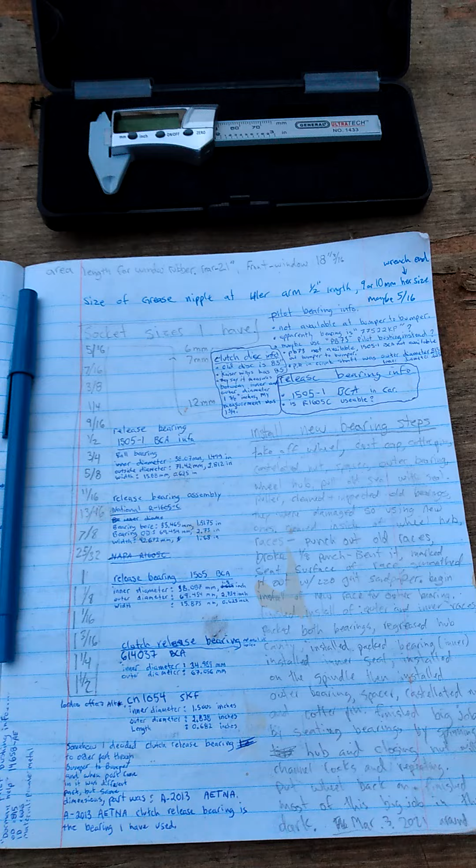Today's video I'm going to talk about a whole bunch of stuff. I don't know, I'm kind of a little bit mixed up in my words right now, as usual.

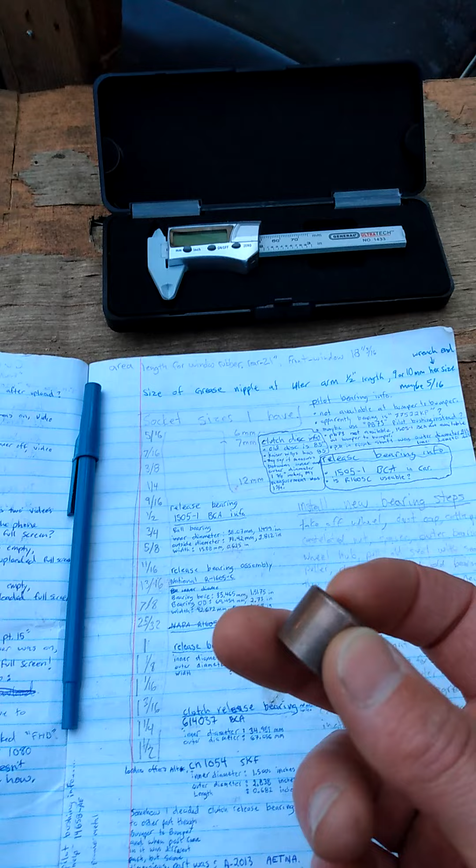But anyways, so this is the pilot bearing that I was looking at a little while ago, right? So I finally got around to searching for the pilot bushing. So I kept on picking away at it, doing internet searches, talking to people like Bumper to Bumper about if they could get me a bearing. That's apparently the bearing that was in the end of the crankshaft in the Rambler. Apparently it was outer diameter 0.815 and the inner diameter was 0.625.

Right, so I talked to the engine builder, and he finally got to it. He pulled it out. I phoned him back about a week later, and he said, "Okay, I'm really sorry, I forgot about that, but let me go get it and take a measurement." And so he did, and those are the measurements he gave me. And so I was searching for a pilot bushing with the same outer and inner diameters, and that was the pilot bushing PB73 by Pioneer.

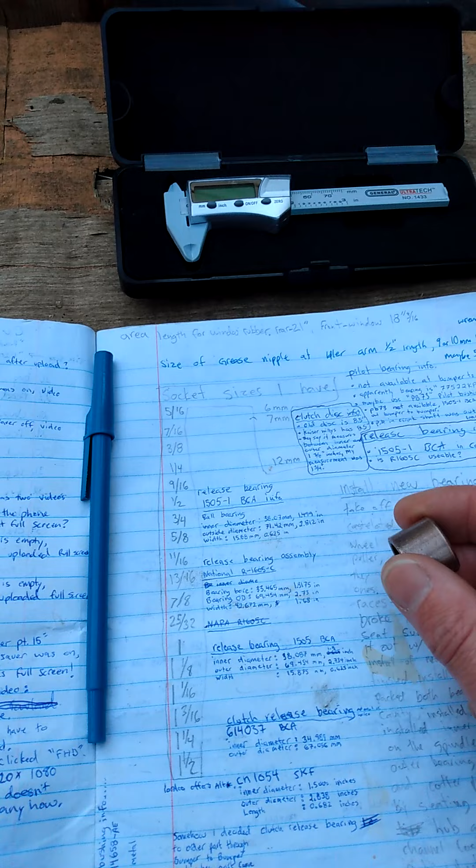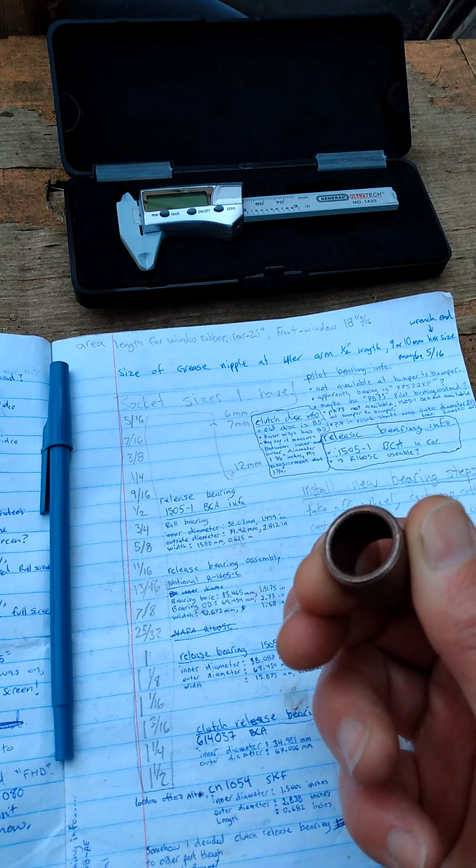Now, the guy that was redoing my clutch down in New York, he said there's certain pilot bushings I can't find, right? So give me the dimensions of yours and I'll see if it's one that I can't source, and we'll go from there. So I gave him the dimensions of the pilot bushing that was in there, and he said, okay, that is the one that I can't find, so I'll just make you some out of Oilite. And apparently Oilite is oil-infused metal. So that's apparently really good for a bushing, right?

Go figure. Or don't go figure. I don't know. I'm not really sure if that's a nice thing to say to somebody, but in case it isn't, I take it back.

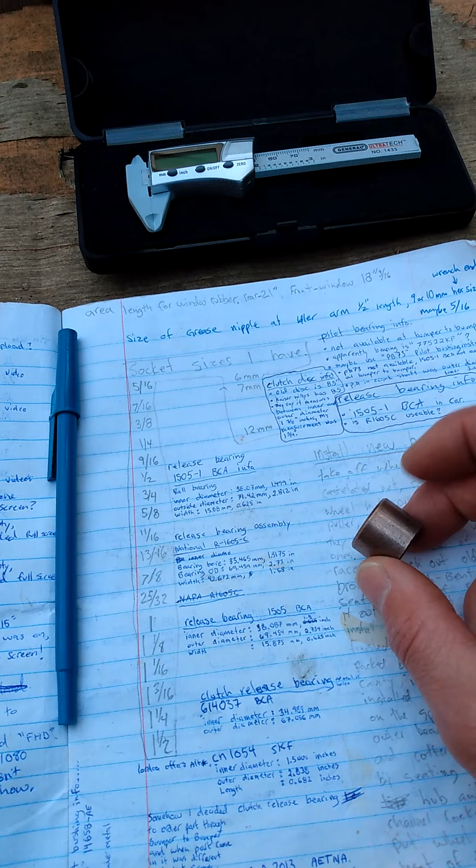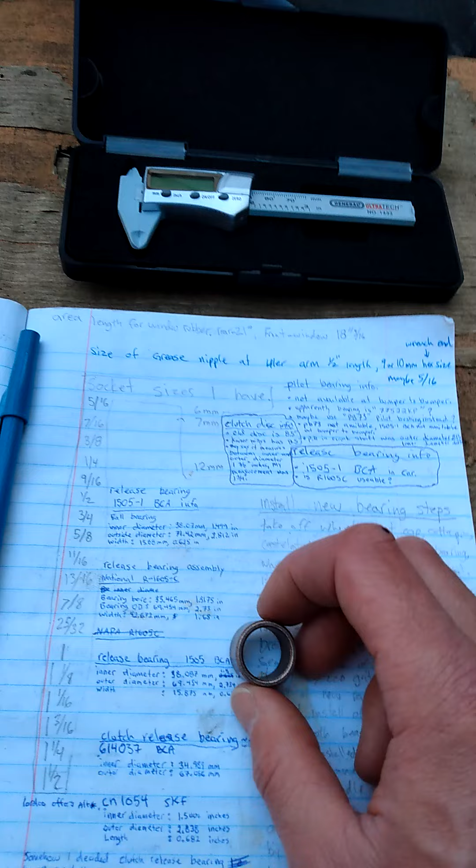Anyways, so I was talking to him about the pilot bushing, and he said, yeah, I can't find that one, I'll just make you some. And then I said, okay, well, I haven't given up on looking. And what I did is I did my own search, and I found maybe 2 or 3 places that had a pilot bushing that was literally maybe 0.001 of a difference. Instead of being 0.625, it was 0.626.

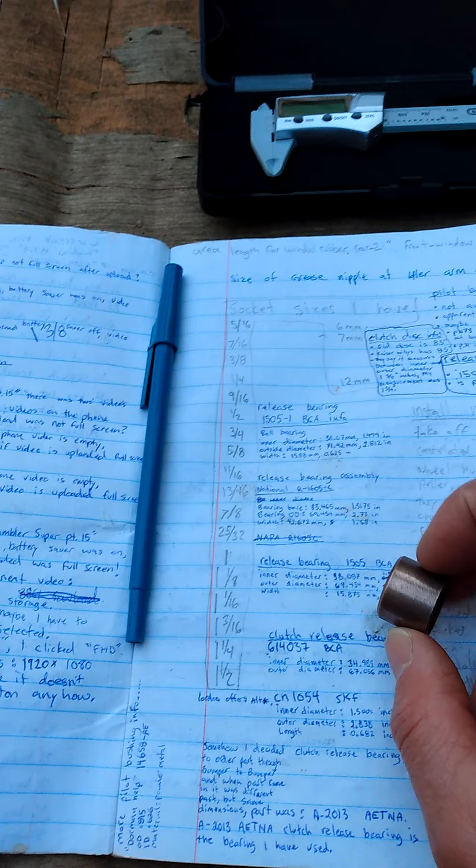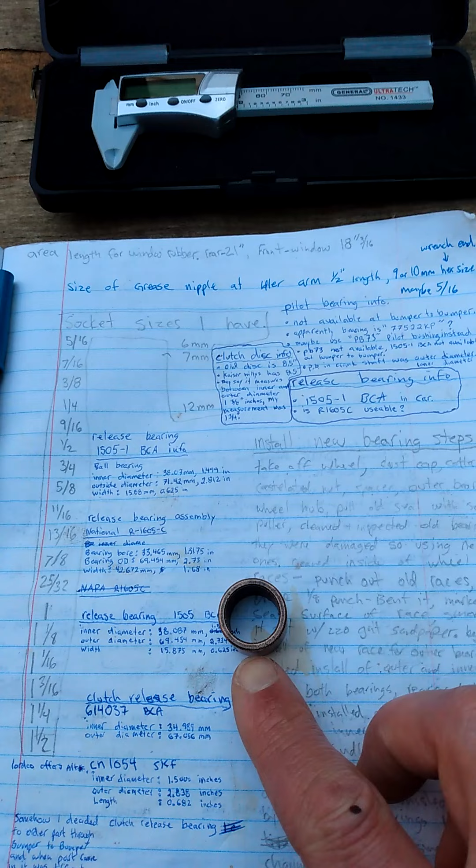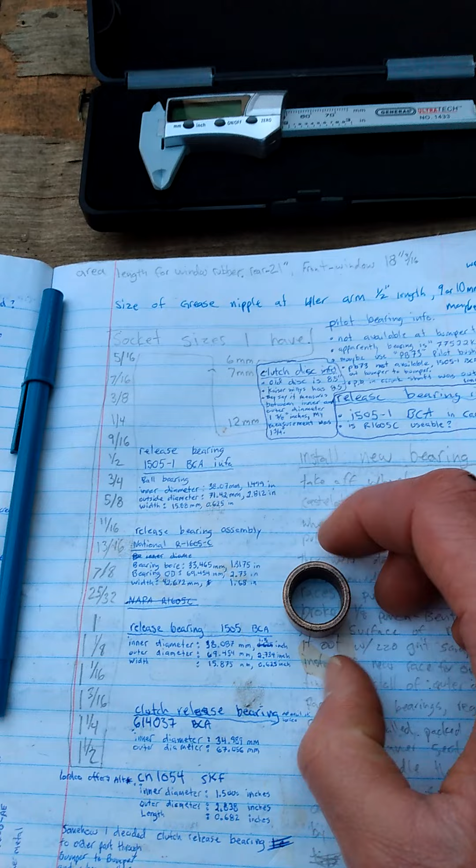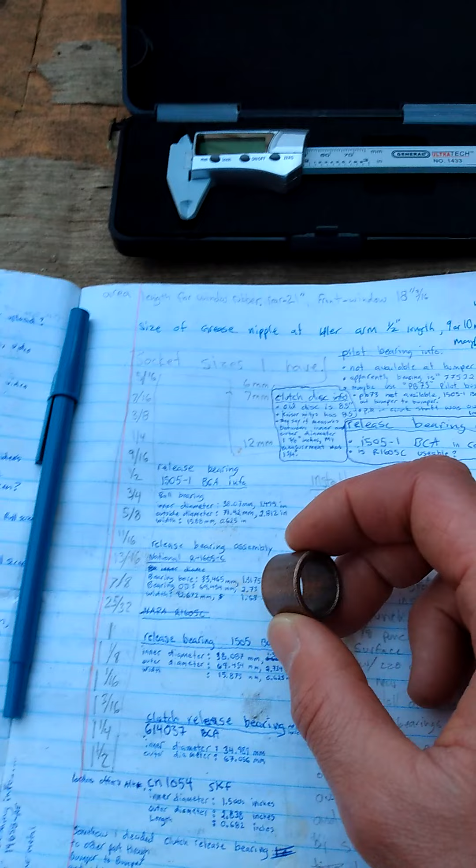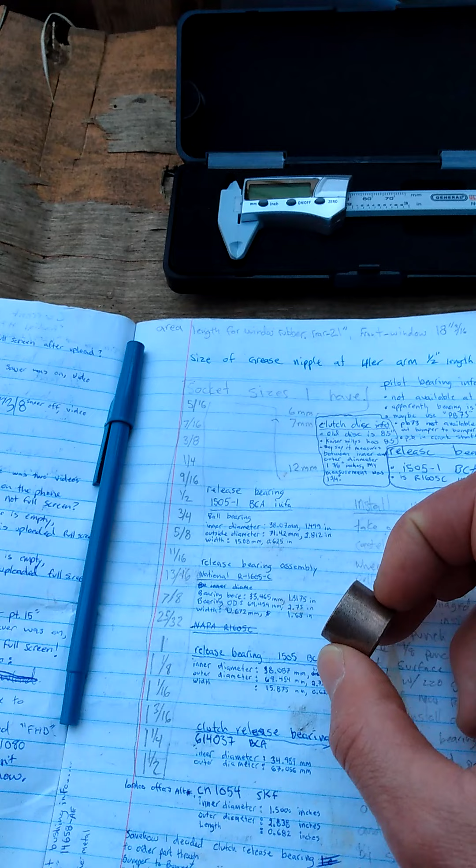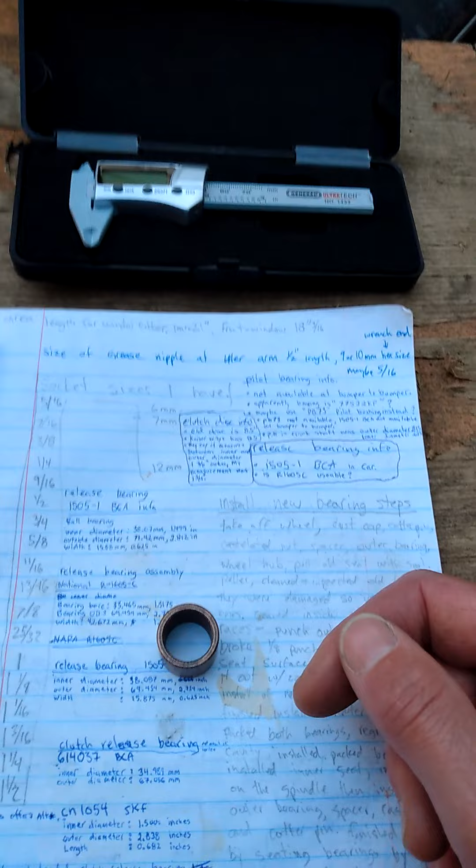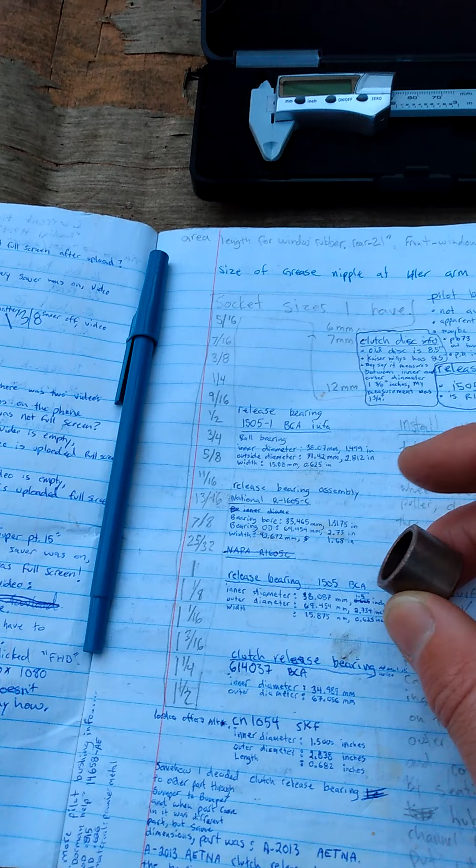According to him, if I understood him correctly, the only time that the transmission input shaft will be spinning inside this bushing is when the engine speed is going faster than the transmission input shaft's speed, like when you're revving to change gears or something like that. I'm not exactly 100% sure how all that stuff works. But he said, yeah, a bronze bushing should work fine, but Oilite would be better.

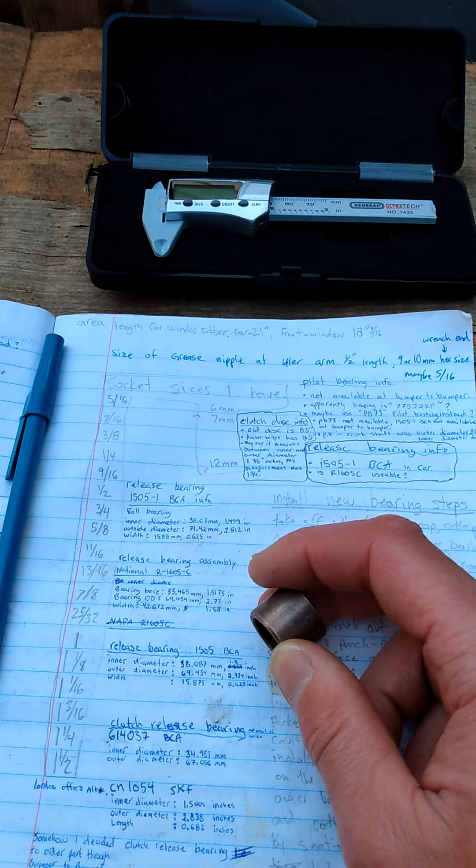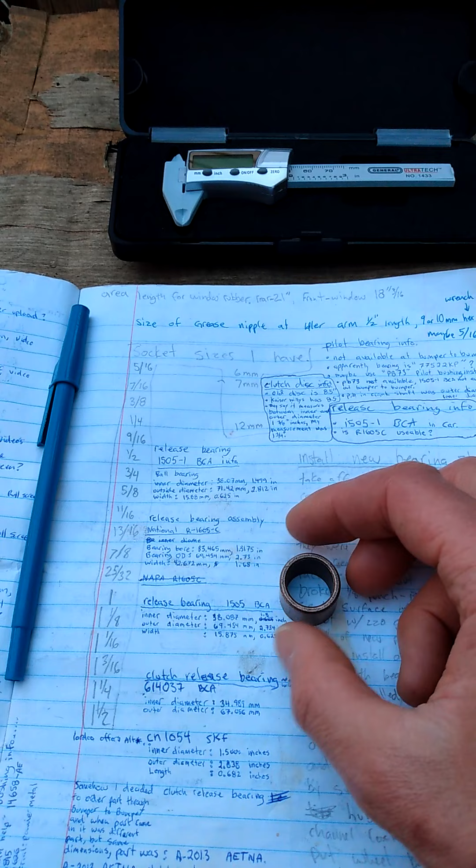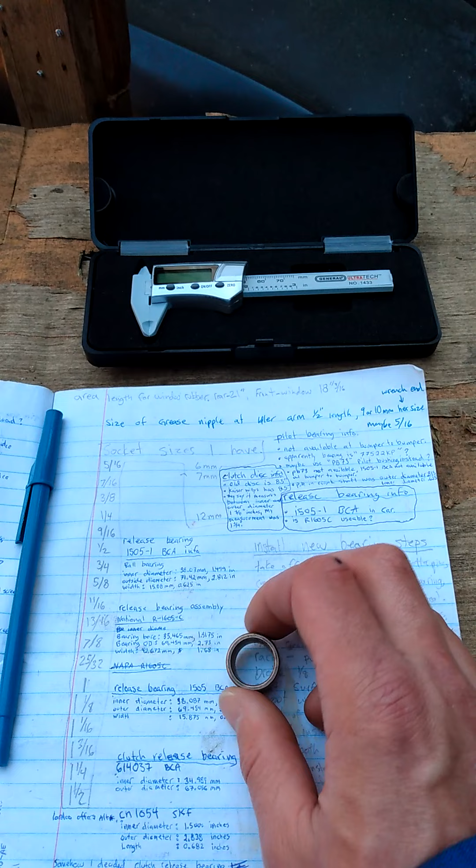The reason why I didn't want to use the Oilite bushing is because the guy doing my clutch work at Falcon Clutch, and he seems like he's doing good work. Not that I've seen it firsthand, I haven't got the stuff back yet, but I just feel like he does good work. Because he has his business, it's a clutch business, so he must be doing good work.

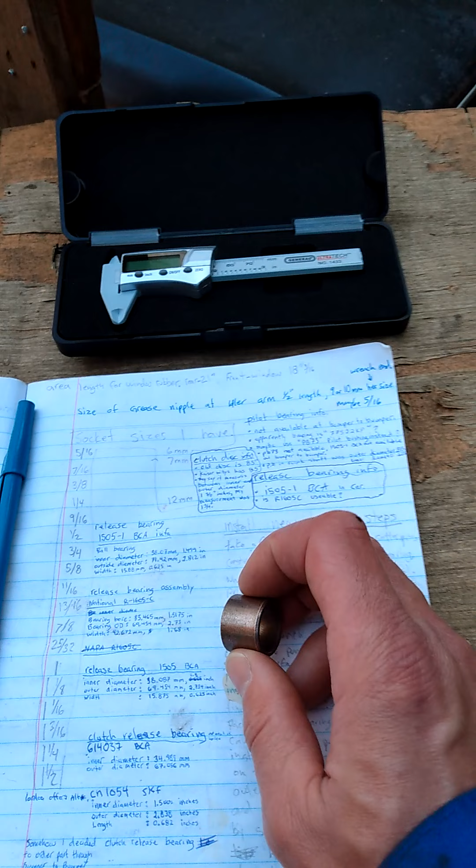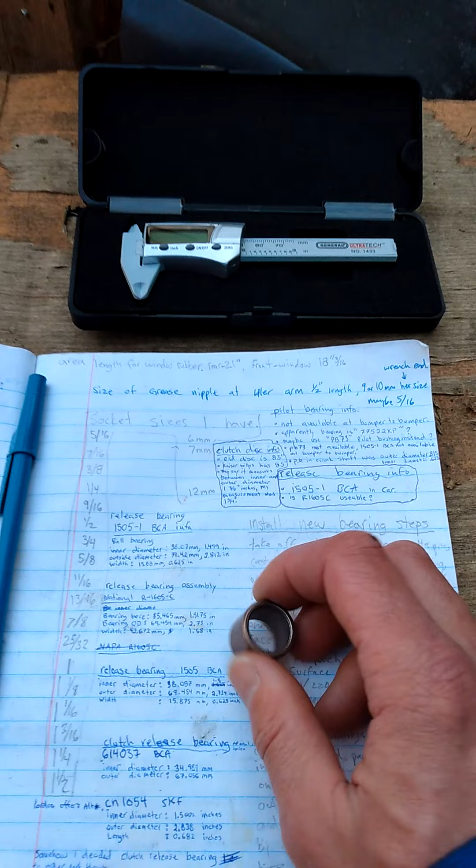But he said the cost of the bushing that he will make for me out of Oilite will be $30, and that was $30 American. So $30 for a bushing, and I'm already spending just a little bit under 500 Canadian for all the work that he did on the friction disc and also the pressure plate.

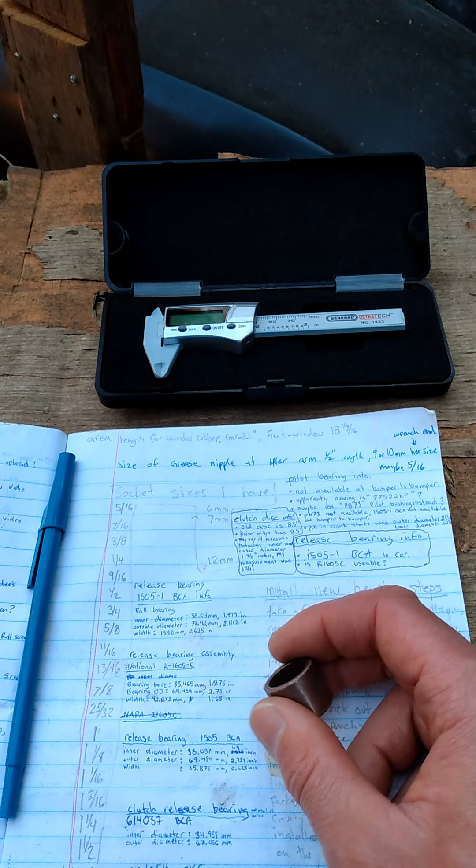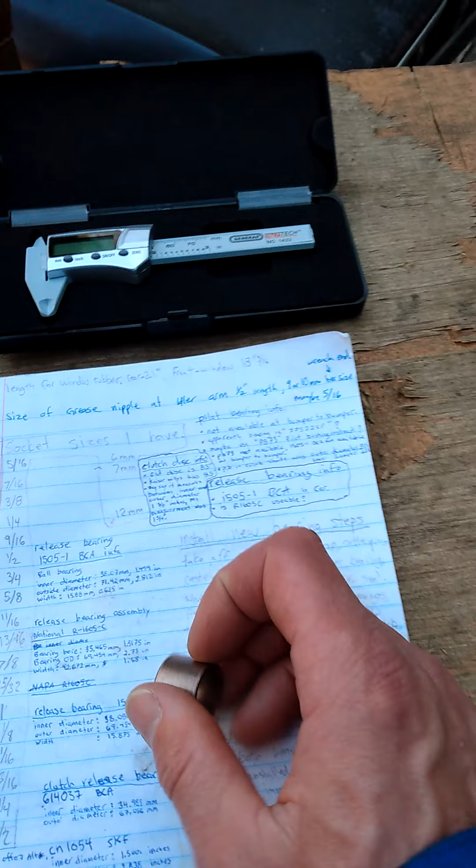And I'm probably gonna have to pay more on top of that too with whatever goes on. Like I've gotten packages and stuff like that from the United States, and before I actually even get it, I have to pay duties and taxes on it again. So I got to pay tax on it, and then I got to pay duties on it again before I can even get it. So it's going to be probably more than $500 to get that work done.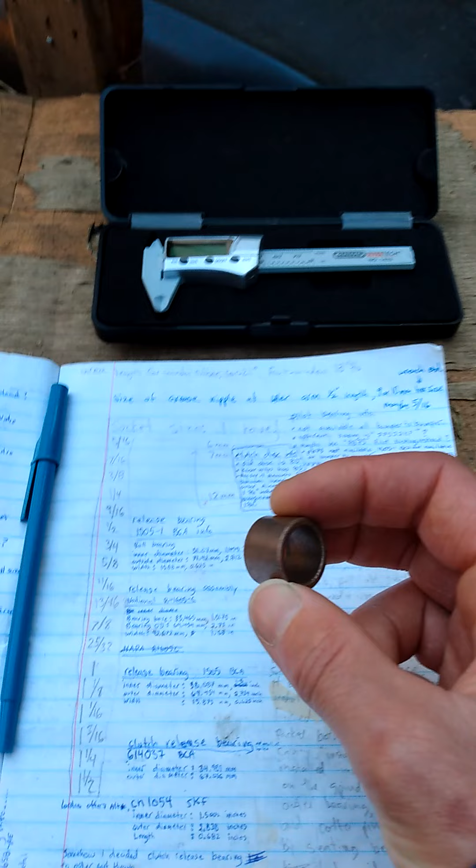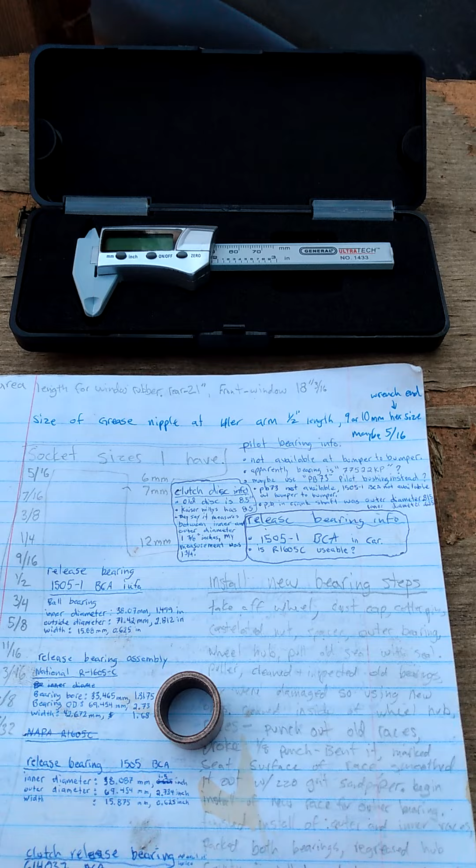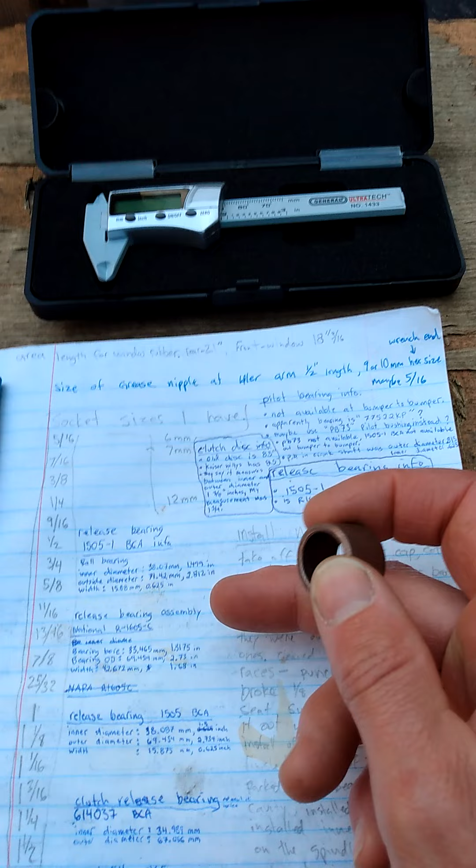You know, and I didn't really want to spend $30 on a super cool bushing when a bronze one would be fine, because that's what's in there right now anyways. It's a bronze bushing that was in there, and apparently that was good enough, right? So yeah, I don't have the receipt with me because it's inside, but this Pioneer bushing PB73 was apparently bronze, and I don't know if you could tell, but it kind of looks bronze to me.

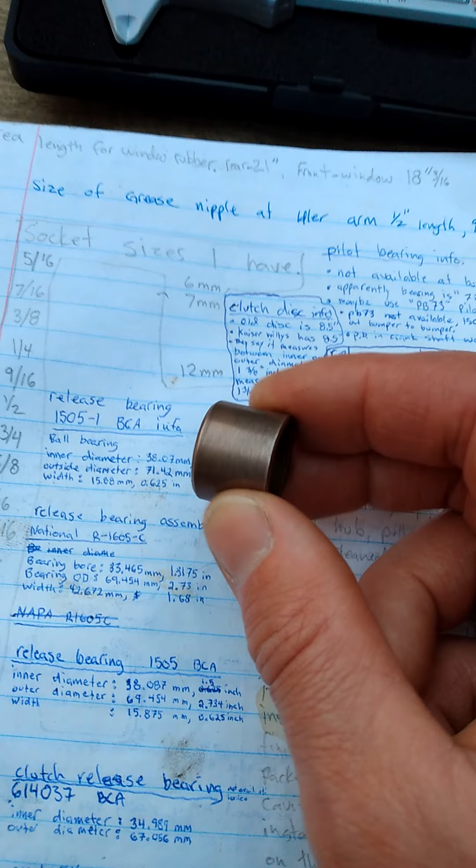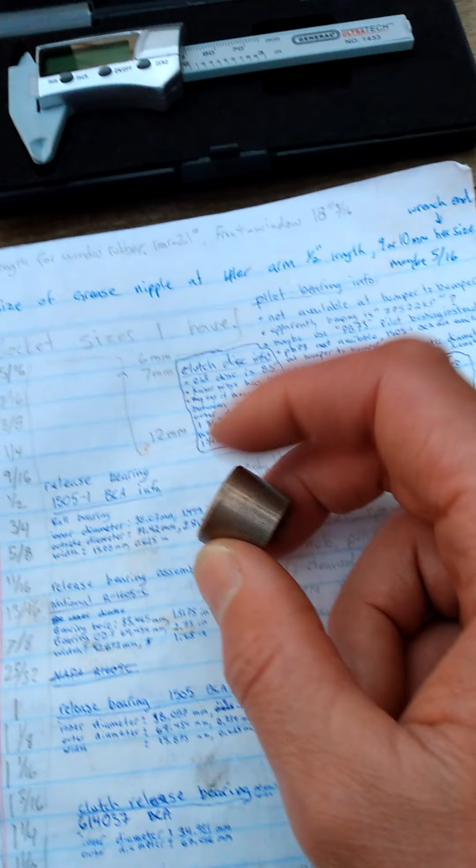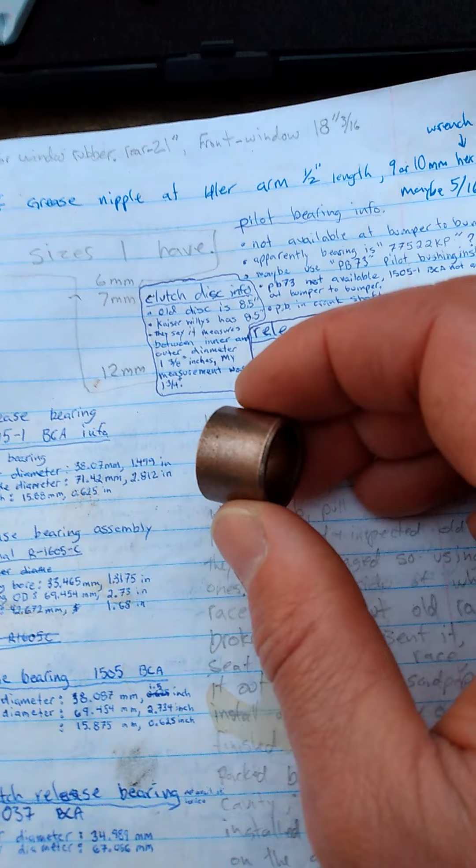And I looked online, and I kind of researched what bronze is for a reason I'll get into in about 40 seconds. But apparently bronze is an alloy of copper and tin, and sometimes it's copper and lead, you know? When bronze gets old, apparently it can sometimes have a little bit of a greenish kind of color to it because of the copper that's in there. So far, I'm right that this is a bronze bushing.

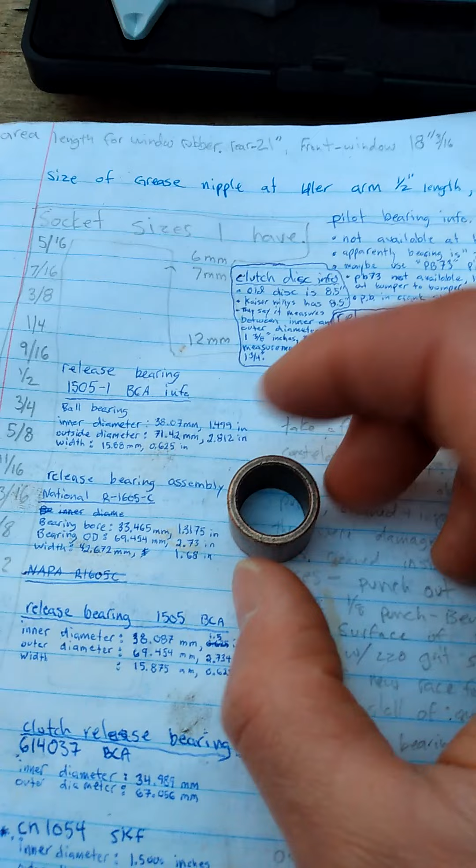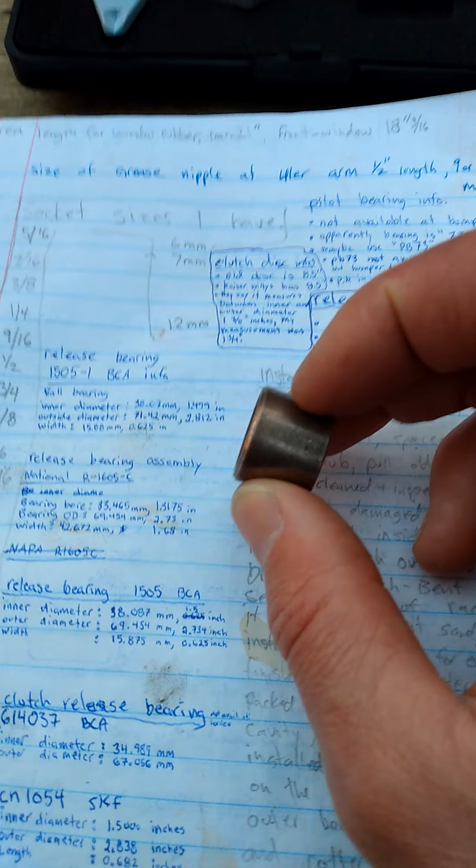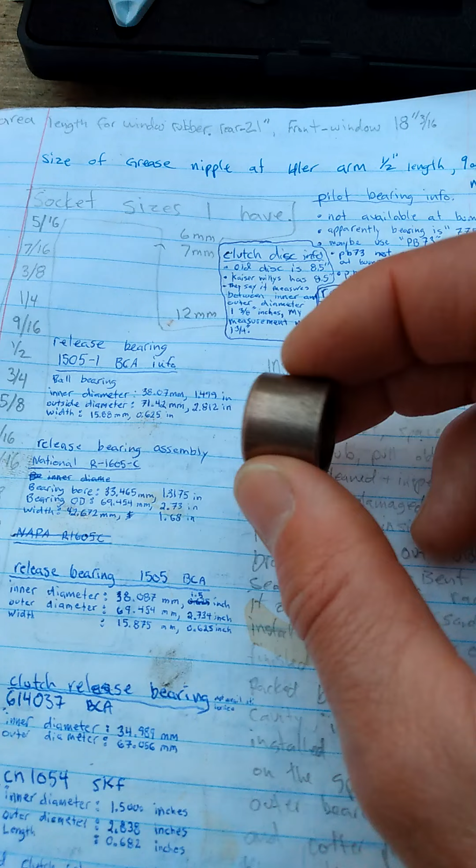The guy down at Falcon Clutch said, "Oh yes, you did find a bushing that you can use. The part number is correct. Pioneer PB73 is those same dimensions, but that bushing is made out of steel, and you don't want to use a steel bushing." And he said that he's encountered people before that have had a steel bushing serving this purpose of the pilot bushing being welded to the parts that it's in contact with for that amount of time. And he said, you don't want to use that. And so I said, okay.

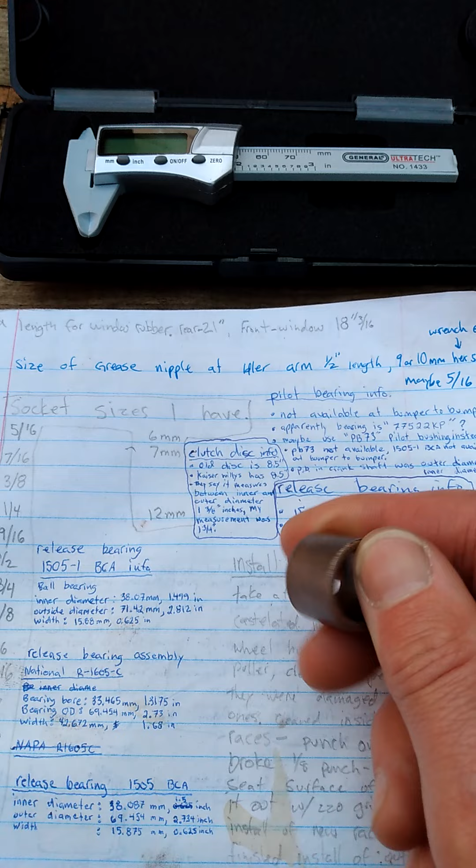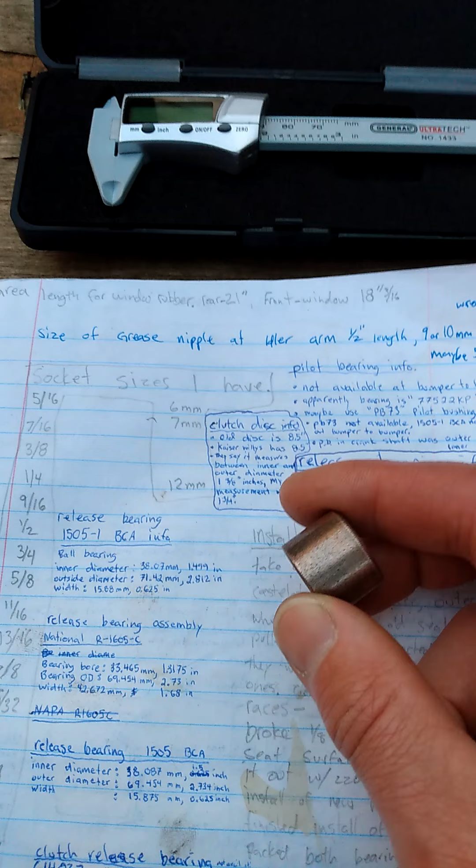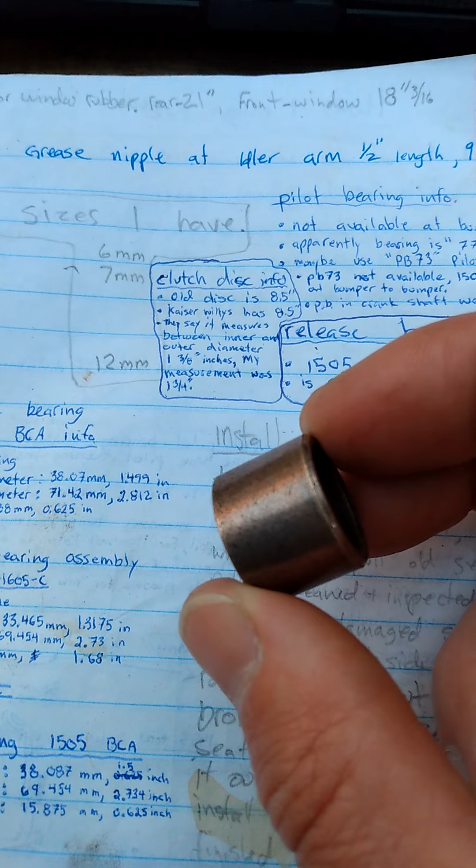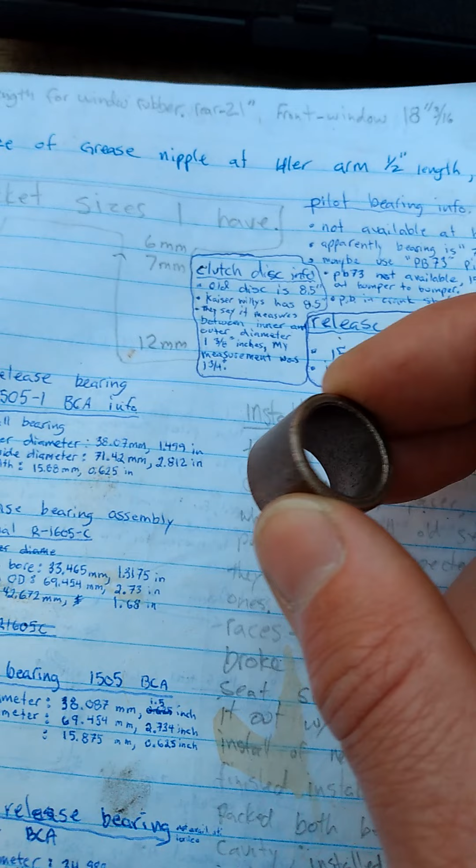But then I was looking at the pictures of this bushing, and this bushing is something I need, and I was kind of having trouble finding it. And I eventually did get it. I achieved getting a pilot bushing. But as I was looking at the picture, thinking about what he said, don't use it because it's made out of steel, I don't think that this is made out of steel because it has a kind of brownish color to it, and steel isn't brown, right? I'm not going to say that the guy's wrong, but this particular bushing here, I don't think is steel. So this is the bushing that I think I'm going to use.

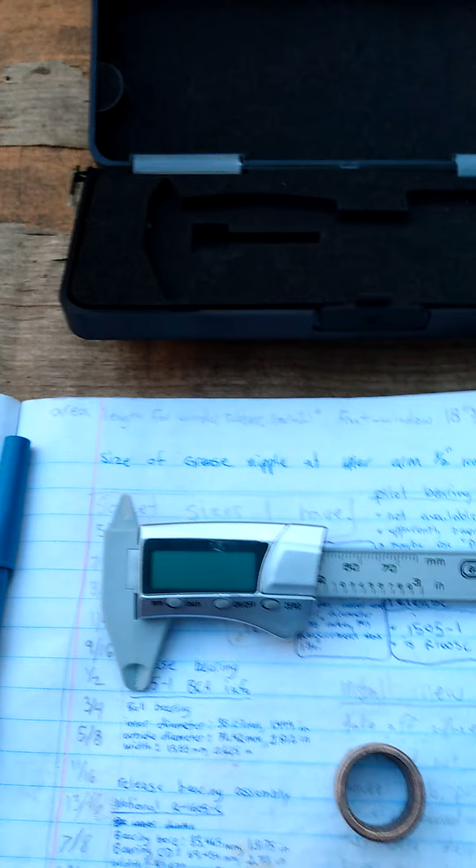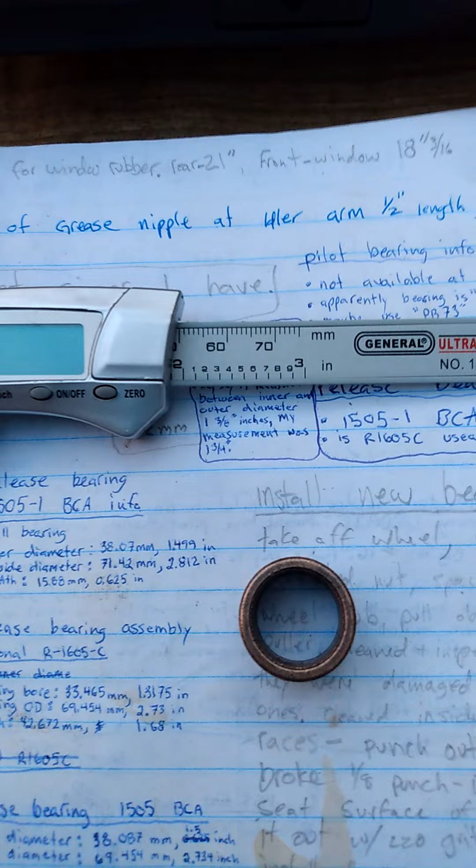Now, I also have a caliper here, a digital one that I just bought. Well, I went to the store, I bought a pair of calipers, but it wasn't digital. It was just a regular one. And as I was looking at it on the bus, I was thinking about these measurements here. How am I supposed to come up with something so minusculely detailed with that caliper that measured up to, I think, 5 inches, 127 millimeters? I guess you'd have to be really good at math to come up with that kind of measurement from a pair of calipers that are not digital.

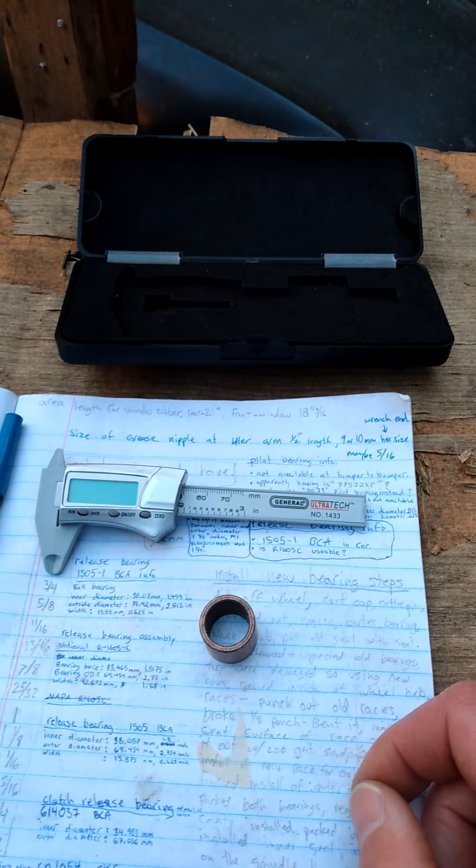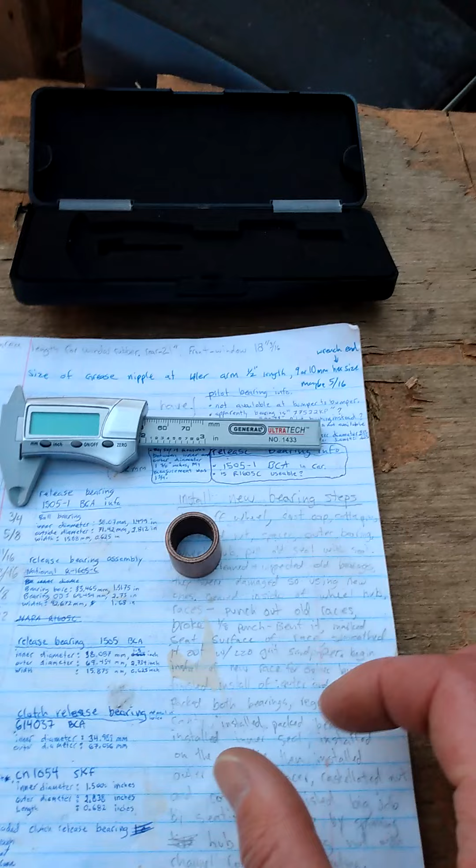So that's not me. I'm not that good at math, but I do enjoy it. I really like doing long division and multiplying a 3-digit number, like 713 divided by 4,337 whatever, right? When you break it down, it's like a gradually narrowing equation as you progress through the calculations. It's so cool. It looks really interesting, and I really like to do that at the bar.

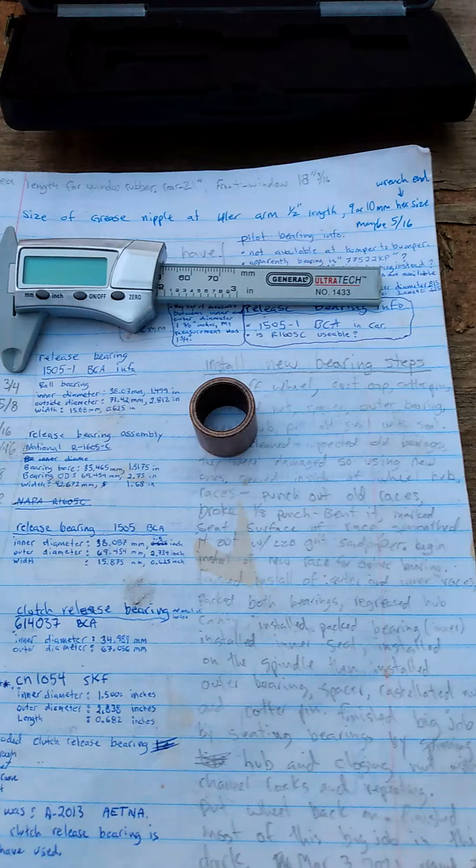You know, just leave it on the chalkboard over by the dartboard, and someone's gonna come along and see it before they erase it, and they're gonna go, "Holy smokes, somebody's pretty smart," because they can do something like that, and it's fun. I like it. Okay, so

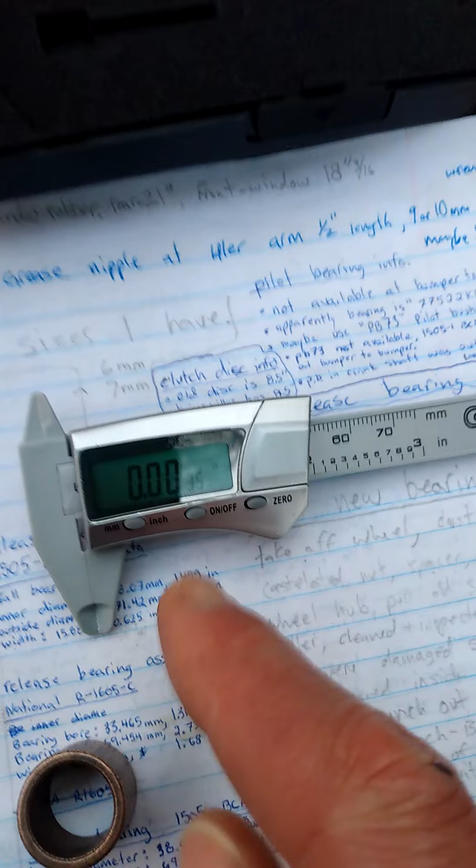Turn it on, and even though it's pressed all the way down to the very end, it'll still give you a misaligned reading, and I think this is because of the material. I've noticed that if you bend these two pieces a bit straighter, so that they're both level with each other, the reading will change. But you can always fix that by pressing the 0 button right there, and it goes down to 0.

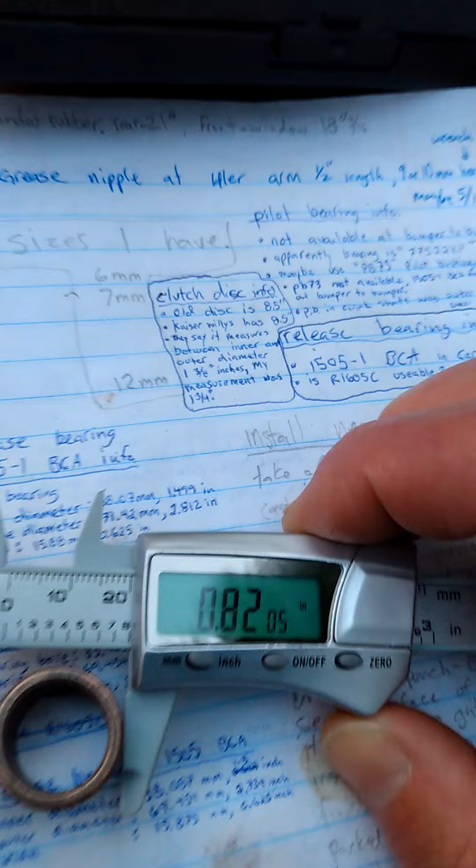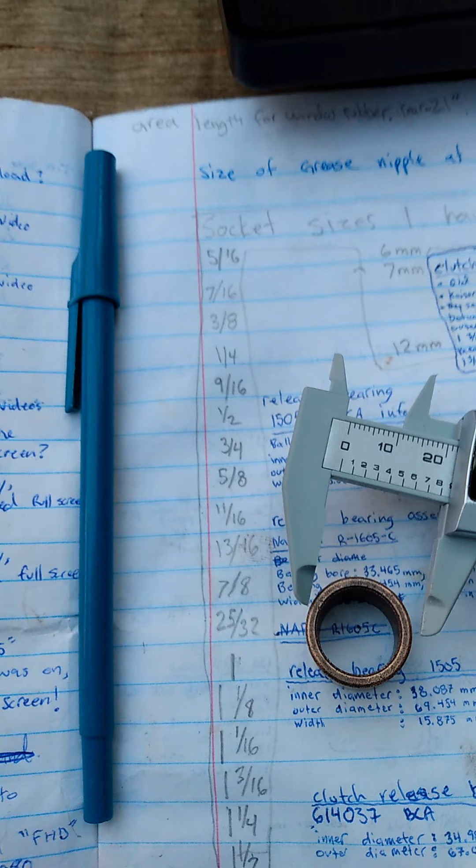And so it's on inches. So this bushing is apparently 0.815. This is the measurement that I get. It's like 0.8205. So I'm not really sure if you're supposed to be rounding up or what. The instructions that came with this don't really go into those details. So I'm just going to have to let that go, I guess.

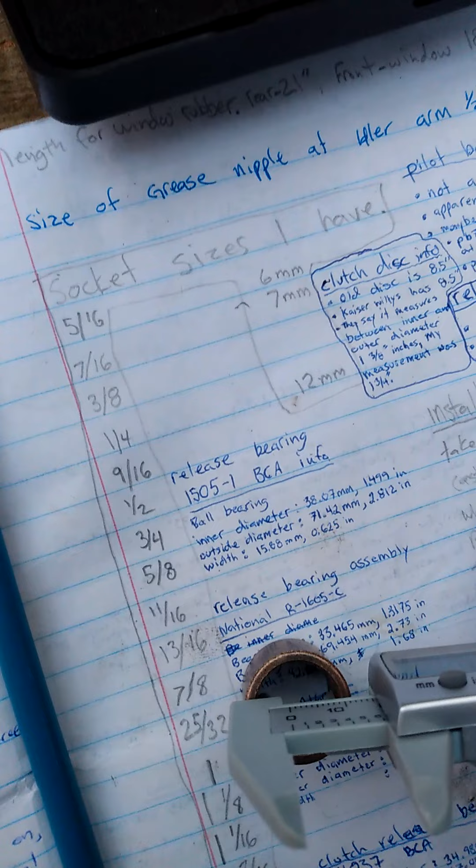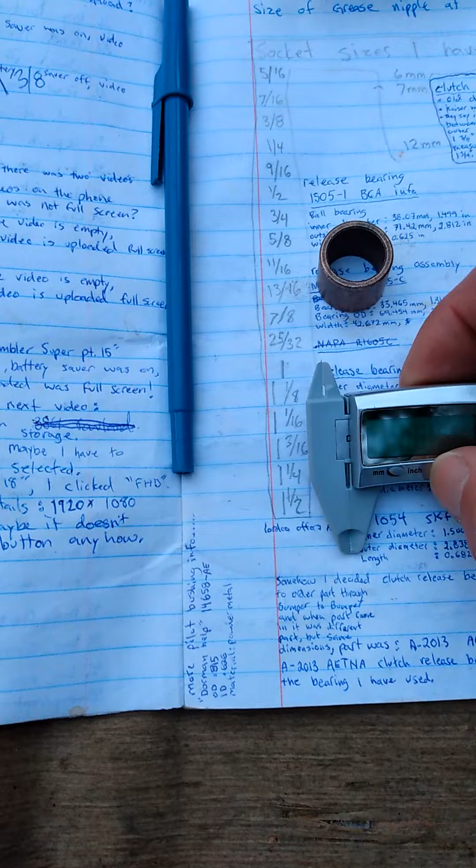And so here the inside is 0.6180. And so it kind of seems like it's around what I'm supposed to be getting. It kind of seems like it's supposed to be that big. So aside from that little bit of confusion that I have, everything's okay, I guess.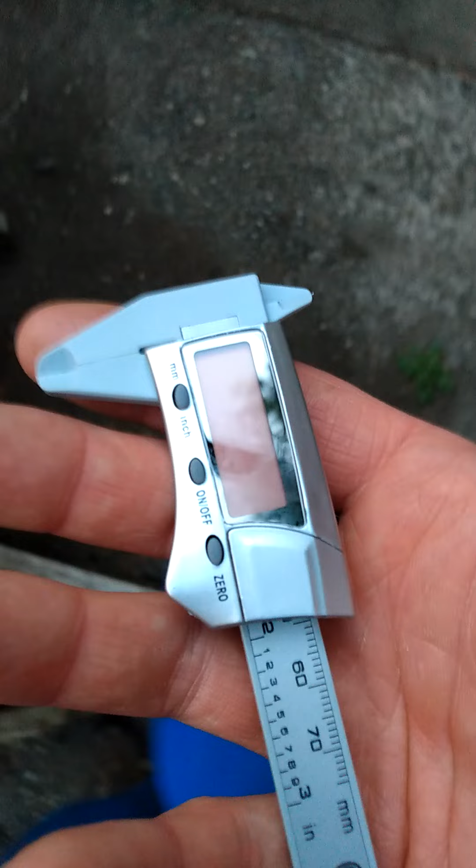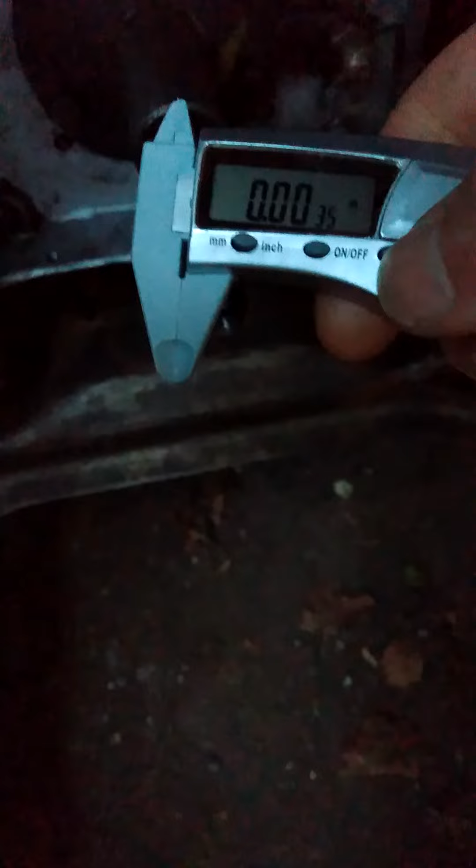Now, what I have to do is take this and go into the Rambler, because the guy down at Falcon Clutch wants me to send him the measurement for the transmission input shaft. He wants me to measure the tip of it, and so here goes that. It's a little bit tough with the camera.

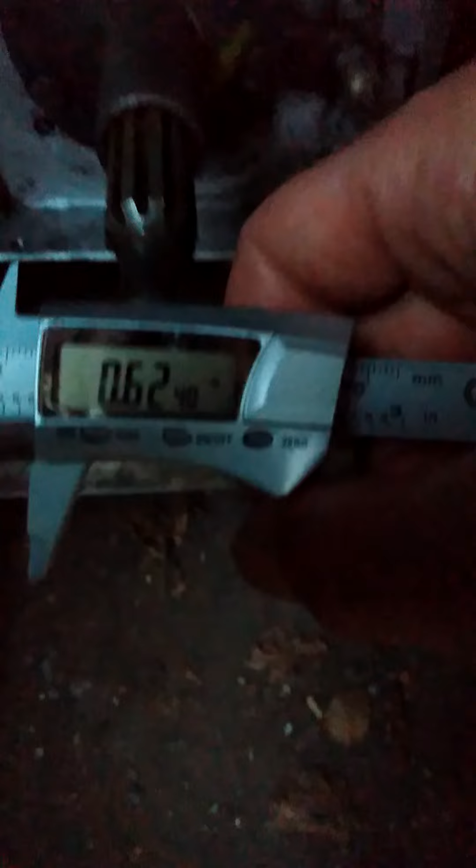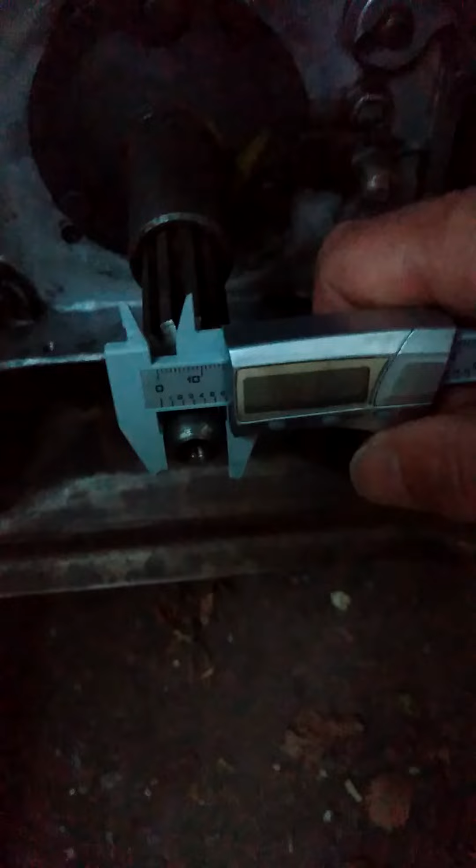Okay, so it's 0.6240. Just gonna check it again. Okay, moving it down. .62. So that is 0.62. So I'm gonna write that down.

Hey, Sean. All done the watering, eh? Yeah.

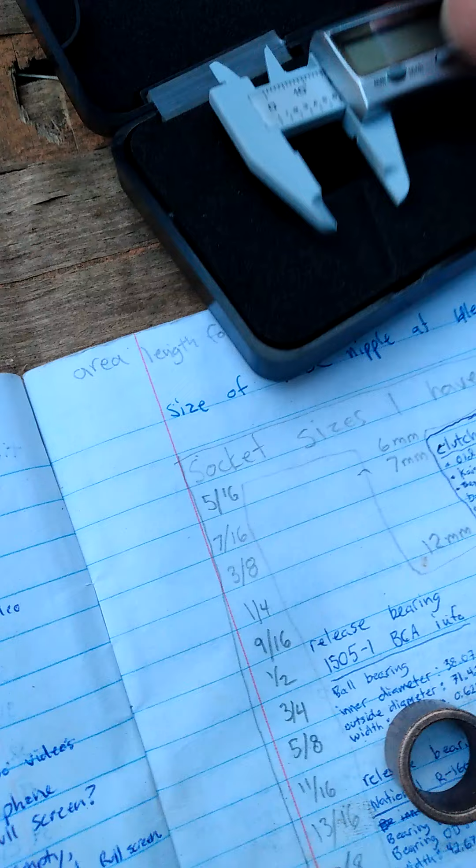0.62. All right, so I'm gonna write this down somewhere. Input shaft diameter.

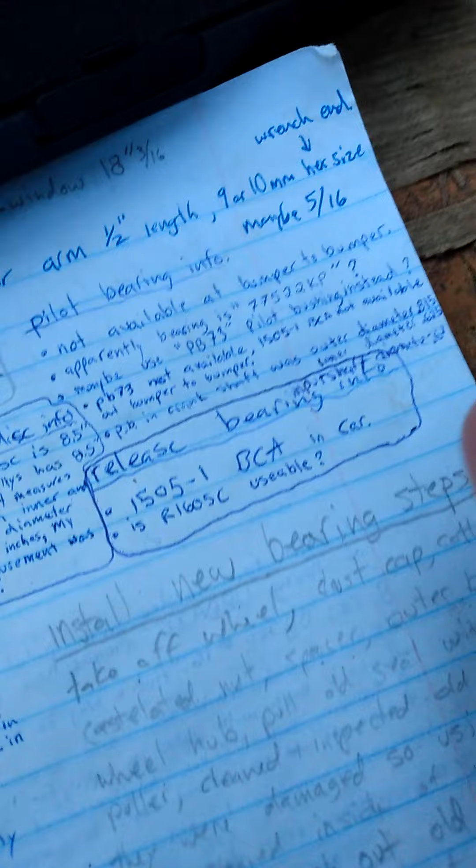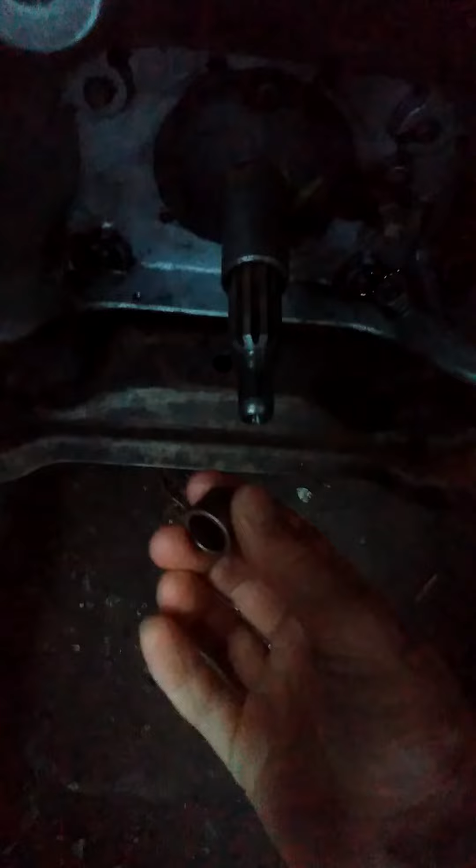0.620. But I want to try something. I'm going to put this on there, see how that goes. Oh! This is where this is supposed to go, like in the engine, in the crankshaft. And then this is supposed to go inside this.

Okay, thanks, Sean. See ya.

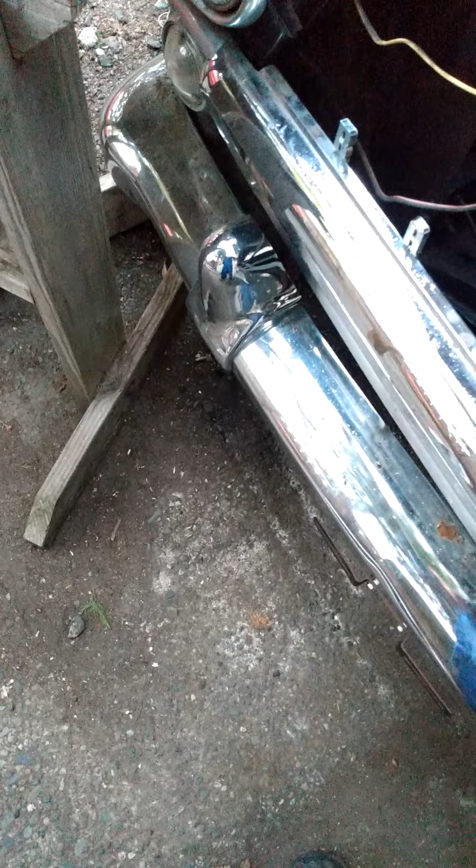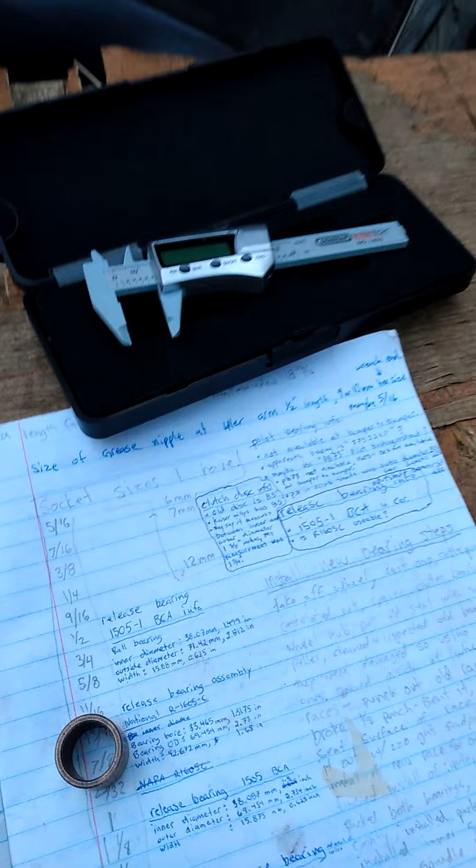And it fits. There's not really a whole lot of play. It spins, so it's a good fit. So that's good. Oh, drop my pen. So I guess I can tell the guy down at Falcon Clutch that it was 0.620, according to what I measured. And I will tell him that I used a digital caliper, etc. So I think that's one of the last emails that I need to send to him.

Other than payment. His wife apparently is in charge of paying, so she has to talk to me about the payment, and I'm kind of eager to get it done and just pay him so he can ship it to me.

Another thing I wanted to talk about: remember how I was talking about how the hood kind of caught on the edge of the body there, and it was scratching the paint? So I looked in the TSM. Apparently there's a way to fix that. I'll get out of the way of the daylight there, but you just move this bolt, and it's been moved already once or twice, I guess. You loosen this one, then you tighten this one, and then you move the hood. And so I just did that.

Now I'm going to tighten it up a little bit. Right? Now, let's test it out. Alright, here we go. Perfect. Success. It doesn't catch anymore. Wonderful. Great. That's awesome.